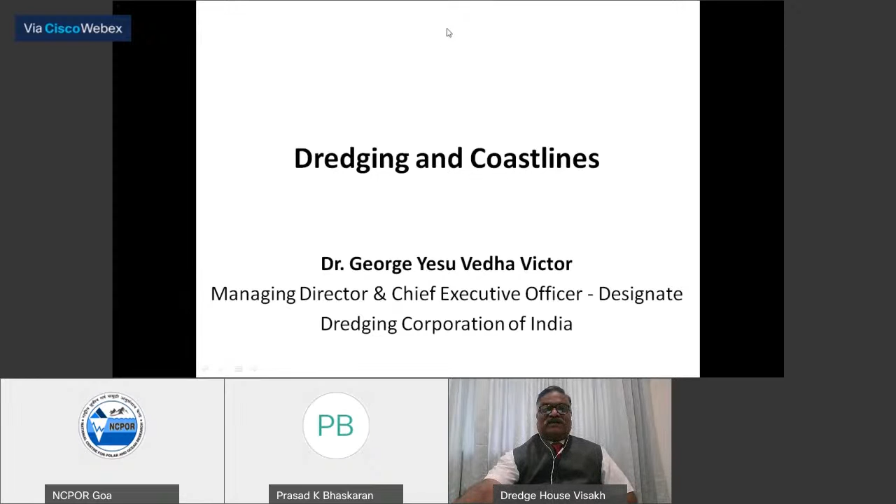To start with, what a coastline is - many of us might have visited a beach, or visited the sandbanks on a river, which forms very unique features. When we talk about coastal regions and people living there, we know the coast has a very unique and distinct feature by which one can find it forms a beach, good for recreation, and the longest beach lines are good for inhabitants to live in.

So beaches are predominantly a good coastal feature, and if someone has observed a beach over the years, one can find that the beach is getting eroded or accreted, which we will discuss in the next few slides. It could be due to waves, because the waves deposit the siltation they carry. It could also be a reverse action - the waves could erode part of the sand on the beach.

The other attribution could be sea level changes, which could have an adverse effect on the coastline. Because we have 12 major ports and about 200 minor ports along the entire seacoast of 7,400 kilometers in India, dredging is imperative and a basic necessity to maintain channels for safe navigation. Dredging also changes the morphology of the coastline, which we will also deal with, on how it changes.

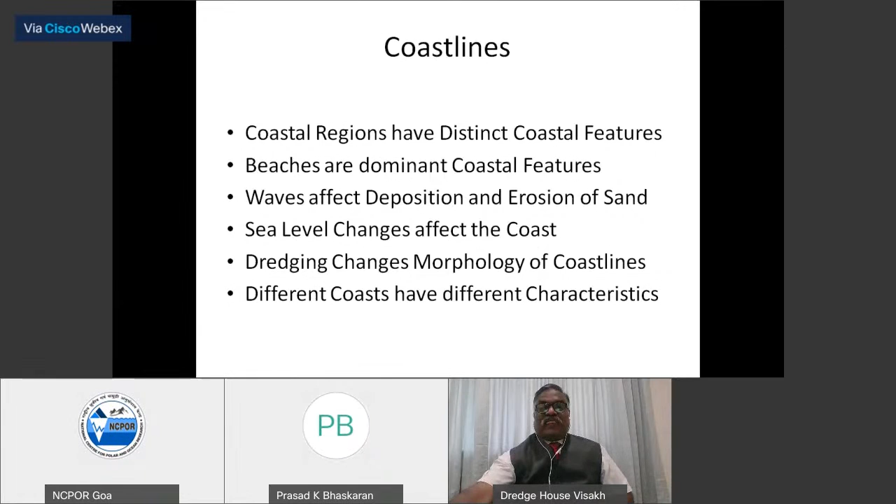A simple example of coastal erosion - it could be natural or man-made. Man-made is due to a structure, and natural could be due to storms, extreme waves, sea level increase, or low pressure that develops in the sea. During a storm, we always have excessive waves, with greater amplitude and height, which carry siltation and material along with it.

When there is a wave breaker, or when it comes close to the coast, it drops its velocity and accumulation takes place. So a storm could either be a phenomenon for accumulating additional siltation, or in places it could also erode the coastline. Similarly with extreme waves - in some places you might have observed the sea is a little choppy with wave breaking zones, or surf zones as we call it.

In the surf zones, normally there will be a shallow area where a lot of accumulation takes place. Similarly, when the sea level increases, a part of your coastline is also being taken away by that increase.

Coastal erosion can also happen because of man-made structures, such as construction of coastal protection. Because we construct so many ports, the coast gets eroded, and to protect our coast we construct groins, revetments, or some other structures so that the coastline is not eroded and is protected.

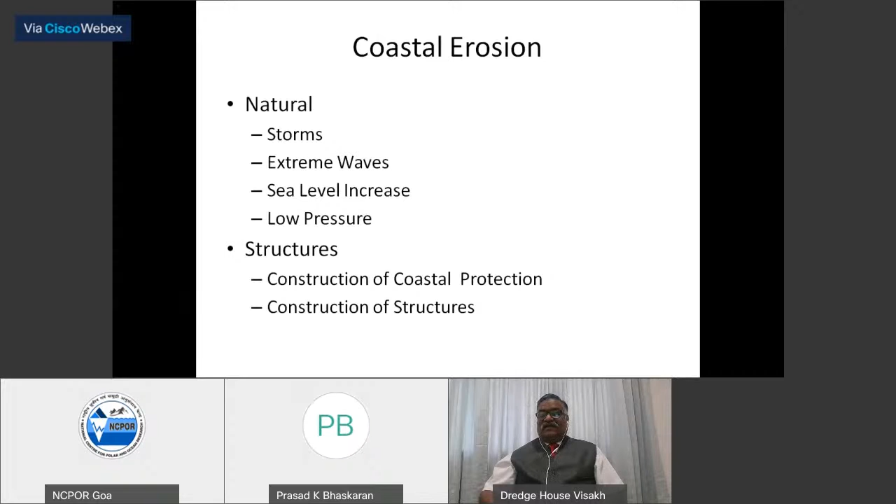Similarly, construction of other structures like a groin, a breakwater, or a trestle, which is mandatory for ports, fishing harbors, or desalination plants, requires some sort of structures. Those structures can have an adverse effect on coastal erosion, and they can either be an action or an opposite reaction.

To give a pictorial representation: winds can have an adverse effect on the coast, waves can have an adverse effect on the coast, cyclones can have an adverse effect on the coast, and so can sea level rise.

When wind, waves, cyclones, or sea level rise occur, it carries sedimentation where the velocity and hydraulics differ in the narrow shipping channel, and it accumulates this carried sedimentation because of the drop in velocity. Once accumulated, it becomes important for coastal or port authorities to clear the sedimentation, and that's where dredging comes into the picture.

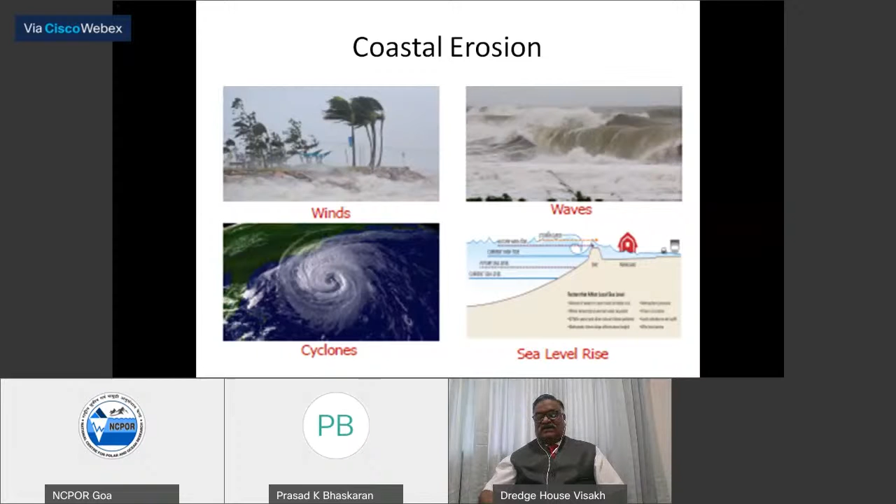Whenever there is a storm or cyclone, authorities measure the accumulated siltation or sedimentation and immediately dredge, or use other cost-effective measures, to clean this material and facilitate safe navigation, which in turn increases the GDP of the country.

So what happens with structures? We saw there are two types: man-made and natural. We've covered nature, and what are the structures? We also know there is longshore drift, onshore drift, and offshore drift.

Take an example: when there's a longshore or littoral drift starting from the south and moving towards the north, if there is no structure or obstruction, this littoral drift will be carried from south to north along with the wave direction. Wherever there is a drop in velocity or a change in hydraulics at a particular place, there might be some deposition and some erosion.

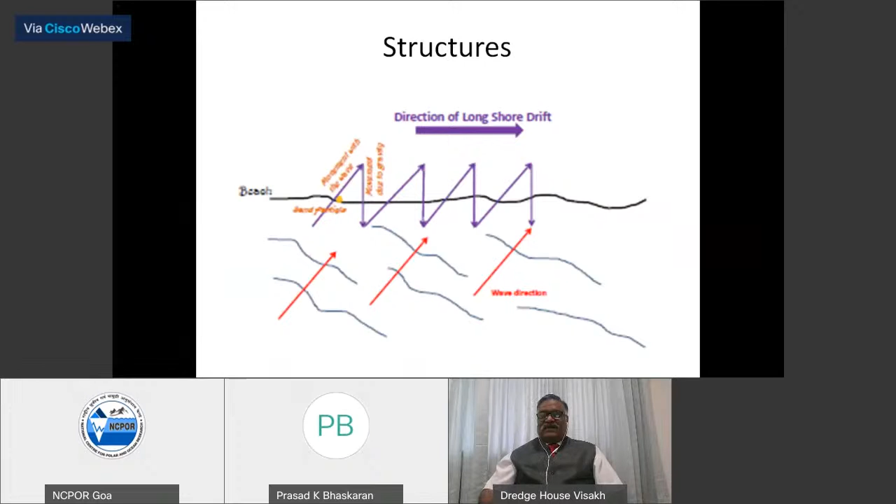Generally speaking, when there is no obstruction from any man-made structure impeding the movement of the littoral drift, the sedimentation is carried uniformly, whether accumulation or erosion happens uniformly. Whenever there is an action, there is an opposite and equivalent reaction. Since there is no action here, there is no opposite reaction.

If you had visited Chennai, Visakhapatnam, or Goa, you could have seen this phenomenon is very predominant. On the southern side you will have a lot of accumulation, and on the northern side you will have a lot of erosion. For example, in Chennai, the Royapuram side as it was in the 1950s or 2000s is totally different in coastline and morphology compared to a few years or decades back.

If you look at Visakhapatnam, it's the same phenomenon. Towards the fishing harbor, or towards Bhimlipatnam, the coastal morphology has changed in the last few years, with accumulation taking place on the south.

Similarly, you can see most of the ports predominantly where they have built some man-made structures by way of breakwater, groin, trestle, or an LNG terminal which is slightly into deeper waters. You will always find there is an action and a reaction: accumulation on the southern side, erosion on the northern side, creating an imbalance. That's where the environmental parameters come into major play.

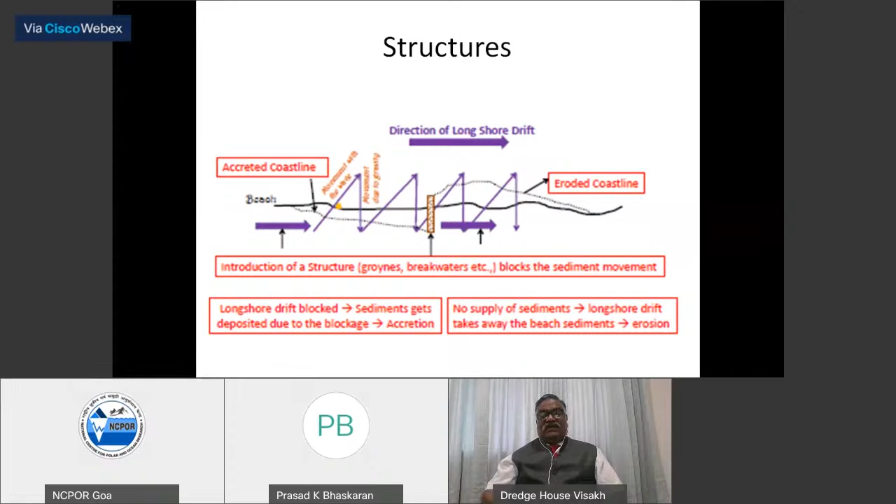And it doesn't stop there. When there is erosion and accumulation, the environmental parameters come into play, and then the environmental scientists come into the picture and devise the best practice methods for how we have to dredge, where to dump or dispose, and how to construct the man-made structure, because we cannot do away with breakwaters or certain structures. So it is a combination of different subject experts in a team which works coherently to see that there is minimum impact on the coastlines and the coastlines do not differ much. That's where the structures come into the picture.

Just to give you a pictorial picture of how the littoral drift or longshore current takes place, I've taken one picture which is in reality, another picture is just an indication of how it looks and how the accumulation takes place. There will be sand particles deposited because the waves break and there is a breakage in the longshore current where the velocity drops. Because the velocity drops, there might be deflection, and the deflection will create accumulation, and it might also spill over into the shipping channel or into the deeper pockets.

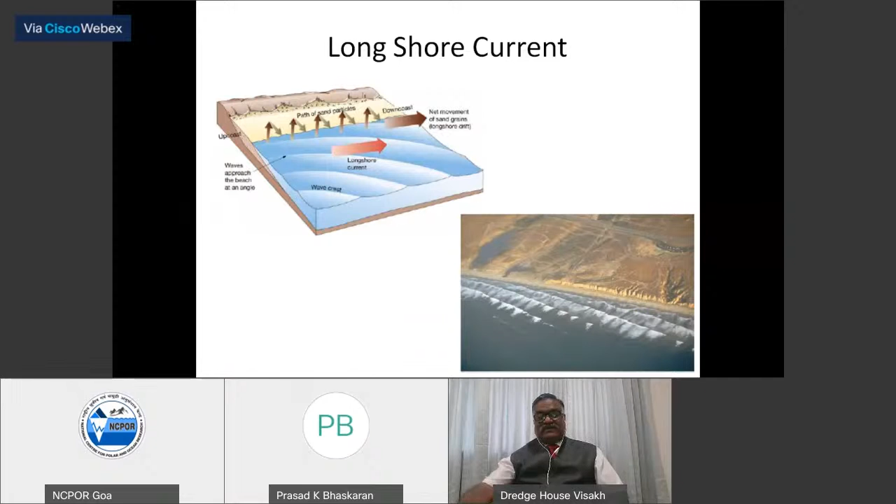On the other side, because there is no velocity, and when the velocity picks up, it always has a tendency to erode and take some of the material from the other side. This is the reaction that takes place when we talk about action and reaction. The action is where dredging is taking place in the coastline, or it could be a man-made structure, or it could be a natural calamity because of rise in sea level, a cyclone, a storm, or heavy waves which carry a lot of material.

You can see at different places how it is eroded, starting from Puri, which is always a target of severe cyclones and storms, Visakhapatnam - last year we had a couple of cyclones, Hudhud and Phailin. Pondicherry is always worst hit, Pondicherry and Karaikal on the southern Tamil Nadu coast. On the west coast, Karwar and the Kerala south coast are always badly affected. Going north on the west coast, a part of Bombay is affected, but not as much as when compared with Puri, Visakhapatnam, or other places on the southern west coast.

If you go further north, the predominance of the effect because of natural calamities decreases, but the phenomena of calamities because of man-made structures increases. If we compare the slopes of the east coast and the west coast, it's drastically different - the west coast slope is steeper, whereas the east coast slope is tapering and gradual. That's one of the reasons you have a lot of sandbars, sedimentation, and siltation getting accumulated in the channels and elsewhere.

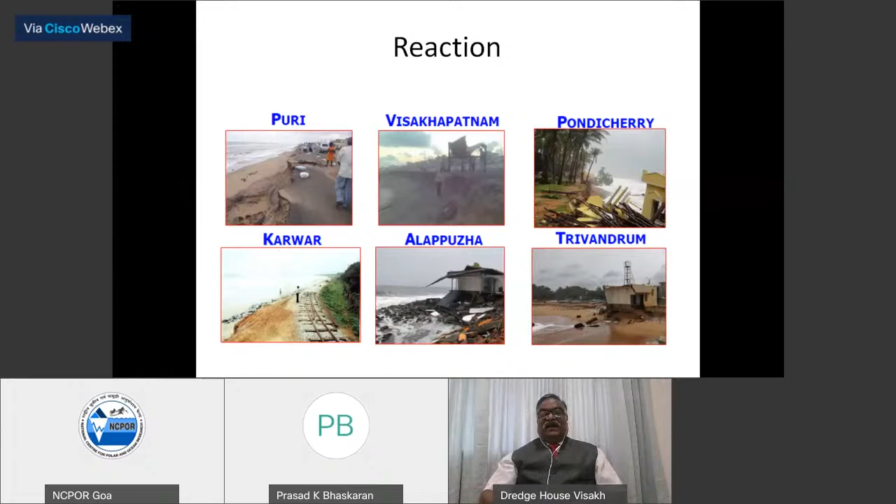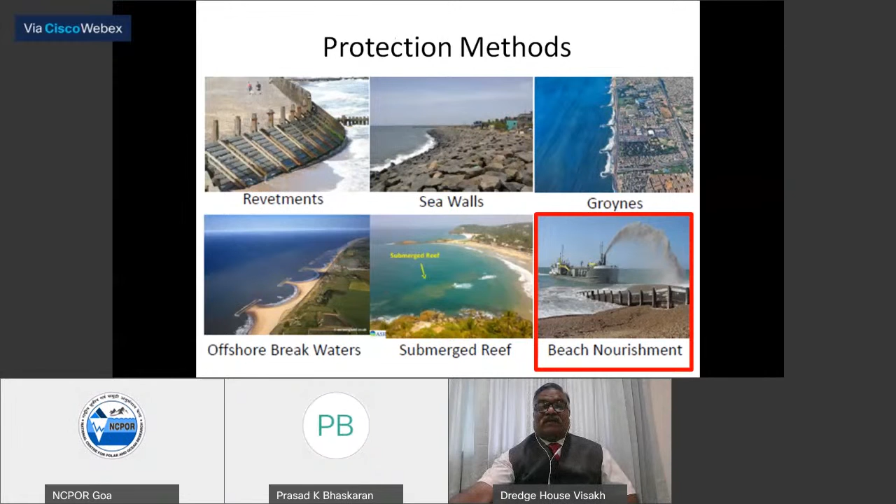So while talking on the coastlines, I said one of the activities the Dredging Corporation of India is involved in is beach nourishment. So let me talk something about dredging. Many of you might know what dredging is, and many of you might have seen dredging activities. But I wanted to give you a bit of an explanation, and collaborate the coastline, the dredging, and the environment. So for that reason, I just wanted to give you a very brief idea of what dredging is.

Dredging started as an art. It was no rocket science those days. It started way back, as old as civilization, when people found that water was getting intruded into their places and wanted an elevated place. That's where they started to dredge. And the first dredging technique was using their hands, to carry the sand and put it on a place where they get an elevation.

As time passed, it became a sort of existence, a survival for existence. And the survival for existence was to avoid water coming into the living area, into the habitat. So they used some sort of technique to have material picked up from the seabed, or picked up near the coast, and then create an elevation in the living area.

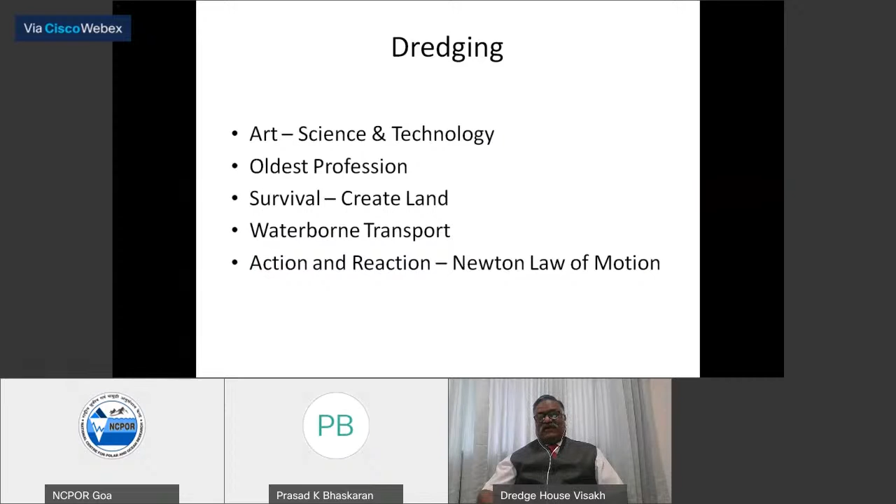When dredging takes place, it's predominant that the morphology is going to absolutely change at some point or the other. It may not be observed close to the dredging area, but probably a little further. In the dredging area, you can always see there is a collapse in the coastline or the material sliding more than what it should slide. So these sort of morphological changes normally take place when dredging activity happens.

Let me give you a small definition of what dredging is. Dredging is nothing but an underwater excavation to create or maintain a new navigation channel, for recreational activities, environmental activities, and commercial activities such as ports, fishing harbors, naval docks, and defense activities, where we need a dedicated port or facility for our naval vessels to quickly get into the sea in case of emergency and requirement. So dredging is basically underwater excavation which removes virgin soil if capital dredging is required, or removes the silted or sedimented material in terms of maintenance dredging.

So in both ways, we remove the material, which could be disposed out at sea at a designated area, predominantly designed by academicians or researchers. Normally it's done by NIO or NIOT. They give us the coordinates where that dumping has to be done out at sea, so that this material does not come back to the coast or back to the dredged navigation channel.

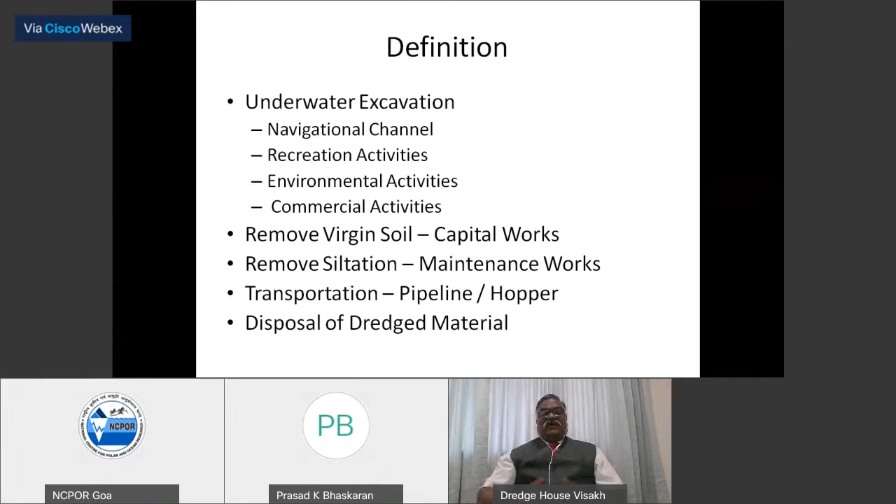A dredger is an equipment used to dredge. In earlier times, it was a primitive age where it all started with hands, then the spoon, then the shovel, and then they adopted other mechanisms which were too primitive. But with the invention of steam engines, engines, and pumps, they slowly graduated based upon inventions added with innovations. Today we are in a better position where we work with the latest technologies.

A dredger is nothing but a tool which facilitates the activities of excavation, storage, transportation, and disposal. The equipment could be mechanical or hydraulic - it can be a mechanical dredger or a hydraulic dredger.

Evolution of equipment, which we already discussed, is basically of two types: mechanical or hydraulic. Mechanical was primitive equipment, and today we have all hydraulic equipment. Nevertheless, we have not done away with mechanical equipment like a backhoe, a grab, an orange peel grab, or a bucket ladder dredger. It's not obsolete even in today's terms. It is more useful to dredge at corners or lesser maneuverability areas where hydraulic dredgers would not approach easily, or where their efficiency would not be economical. So in those areas, we always use a mechanical dredger.

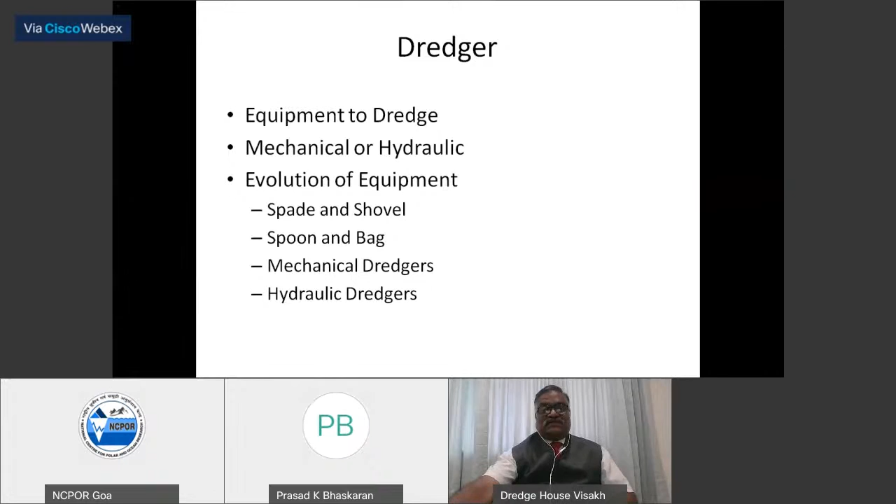What do we do? We develop ports, we develop harbors, dam rivers, and dredge tidal inlets. In India we have only two tidal inlets. One is on the east coast, one on the west coast. On the east coast, the only places are Haldia and Calcutta. On the west coast, we have two, rather three: one is Cochin, Goa doesn't have a tidal inlet for the port, we have Hazira, and the third is Kandla.

So these are the tidal inlets where you have to always keep a close watch on how your channel is going to behave, because your channel alignment might change depending upon your tidal prism. For that reason, dredging in tidal inlets is a bit cumbersome and challenging compared to dredging in a conventional, artificial, semi-artificial, or natural port.

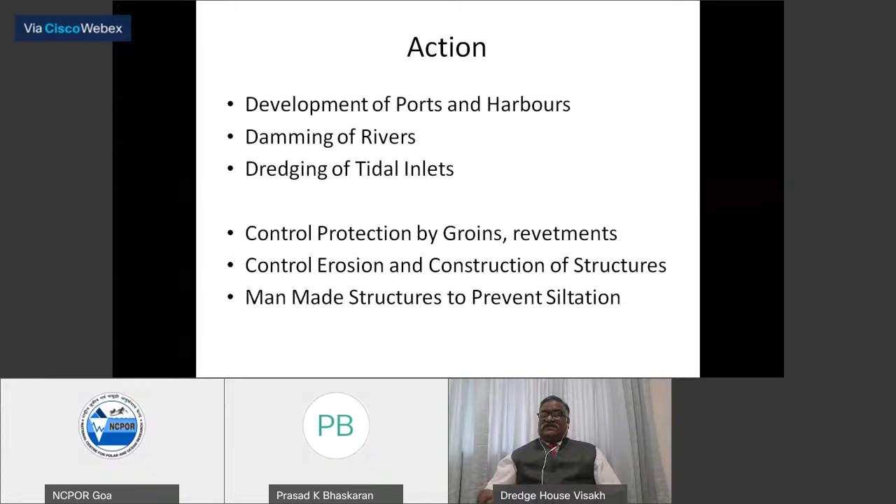The actions are: because we dredge, there is a change in the morphology, there could be a change in the coastline, and there could be changes elsewhere, not within the port limits. For that reason, the reaction is you have to control these changes and maintain balance. So you do some man-made constructions, structures of coastal protection to maintain your coast or your river banks in case of inland waterways, by building groins or revetments, or to control erosion. You also build structures especially for breaking waves and to prevent siltation in case of a tidal inlet.

Dredging activities, as I earlier said, we do not do only one type of dredging. We have a gamut of dredging, which starts with creation of a navigation channel, which we call a greenfield port, and maintenance of the navigation channel is a brownfield port. Then we have beach nourishment to make balance on both sides, and reclamation works, the creation of new land. This concept is not very new, it's very old, and we have created more lands.

Right now in Bombay, we are creating additional land of about 3 square kilometers, 1.5 to 2 square kilometers, and they are extending by another 800 meters diameter. So reclamation works can be for reclaiming low-lying land, creating new land for construction purposes, or creating new land for some other purposes.

Sand mining, again, is not new in India, but now it's one of the key topics of interest for the Ministry of Shipping, where they say you have to dredge, and even sand mining could be one of the options where there is a scarcity of resources, majorly sand.

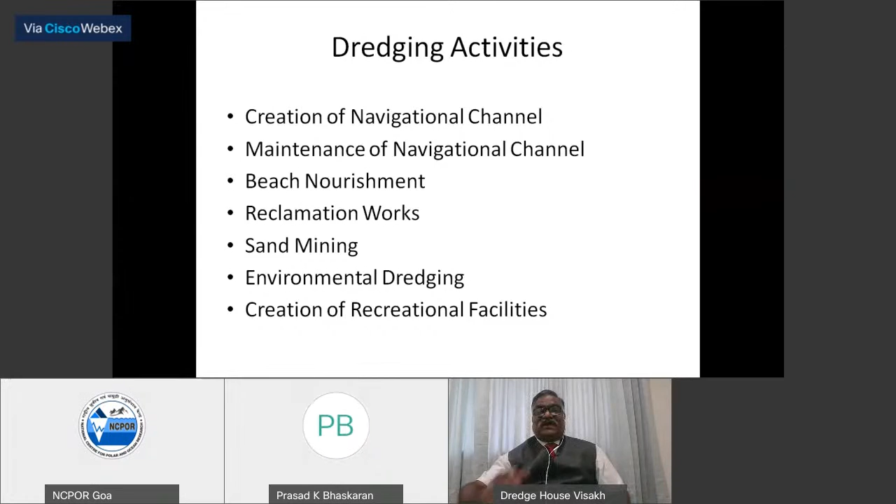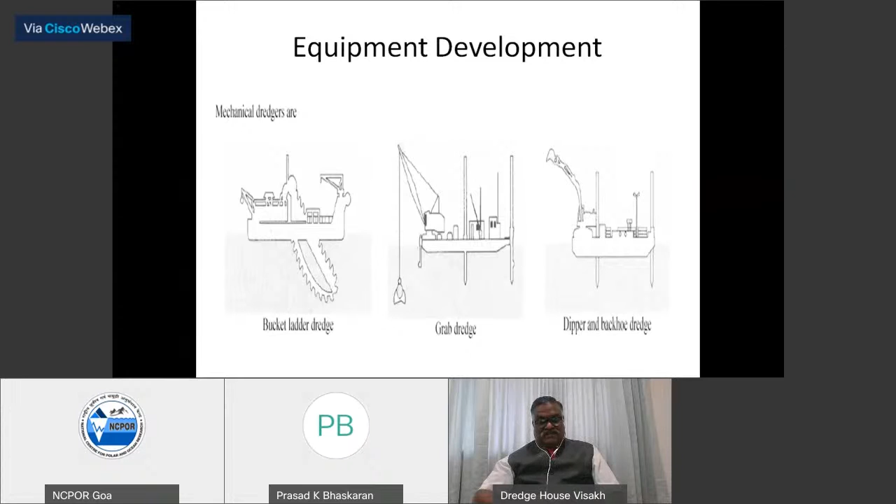I will quickly run through the different types of equipment, starting from the primitive age. I will leave aside the primitive age, and discuss the mechanical dredgers: the bucket dredger, the grab dredger, the dipper, and the backhoe dredgers.

This is a typical bucket chain dredger, which is obsolete because nobody is using it anymore, due to the cost-benefit variance. It's very slow, and the cost per cubic meter is a little higher than the latest dredgers.

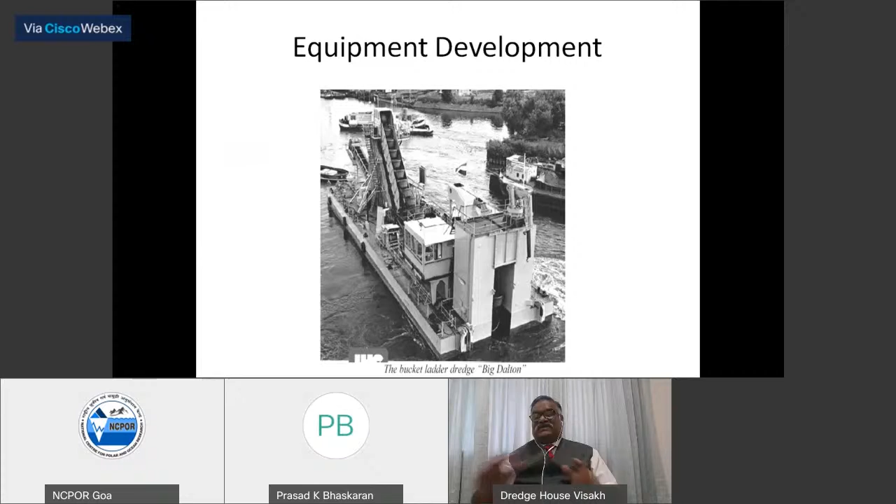For that reason nobody uses it, but it's one of the best tools. There are only two such equipments in the world. One is owned by Rohde Nielsen, and the other one is owned by a private party in the Middle East.

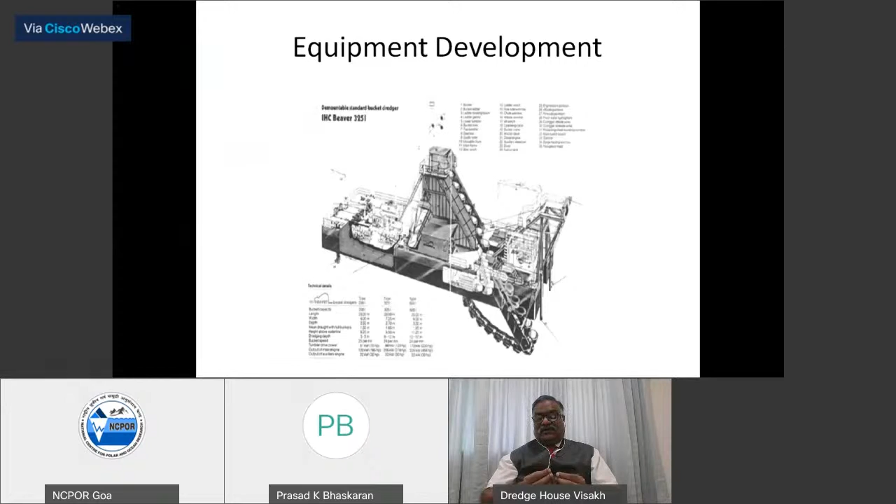This is how it looks like, the bucket ladder dredger, which has a chain of buckets of about 3 cubic meters, and the minimum is about 0.8 cubic meters. This chain runs throughout, and these buckets are made up of heavy material.

So that it can dig up clay, or it can dig up weathered rocks. This is a clamshell or grab dredger, a backhoe, and again a backhoe, a front shovel and a back shovel. We've got two different sorts of backhoes.

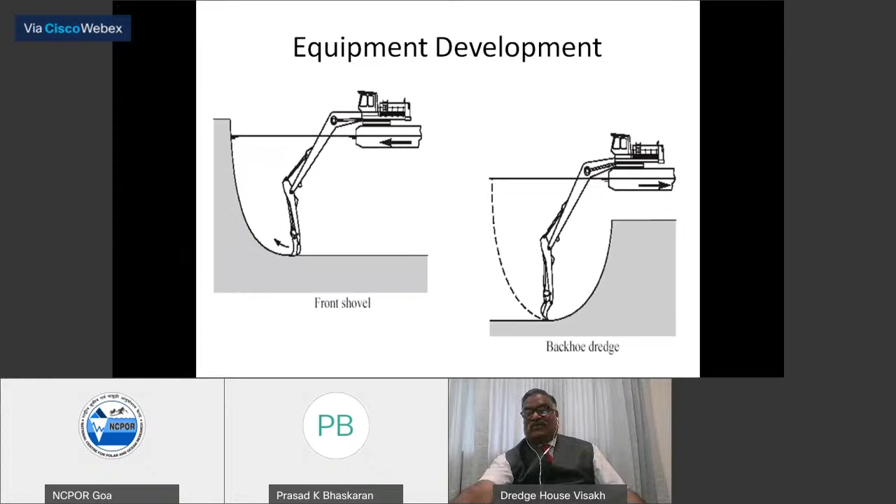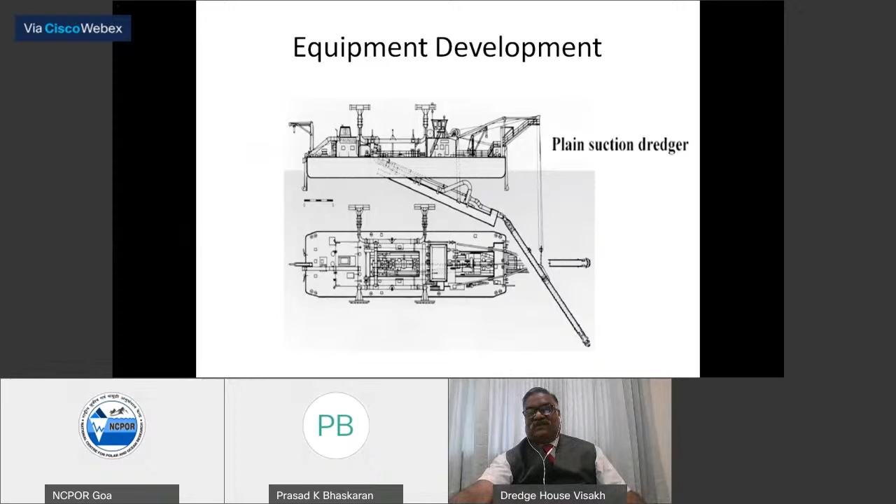This is a plain suction dredger. This is again a cutter suction dredger, but it's a very plain suction dredger, well suited for silt or very soft material. These hydraulic dredgers are basically the cutter suction dredger, the trailing suction dredger, and the plain suction dredger, which form the same family.

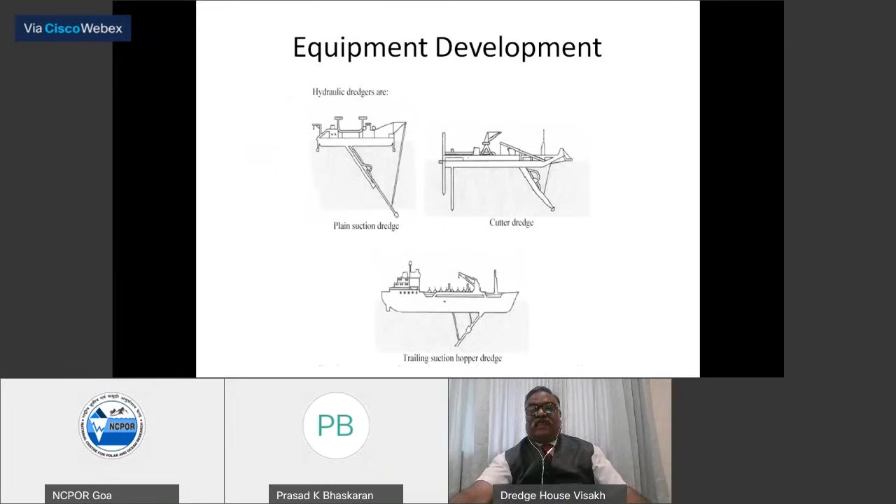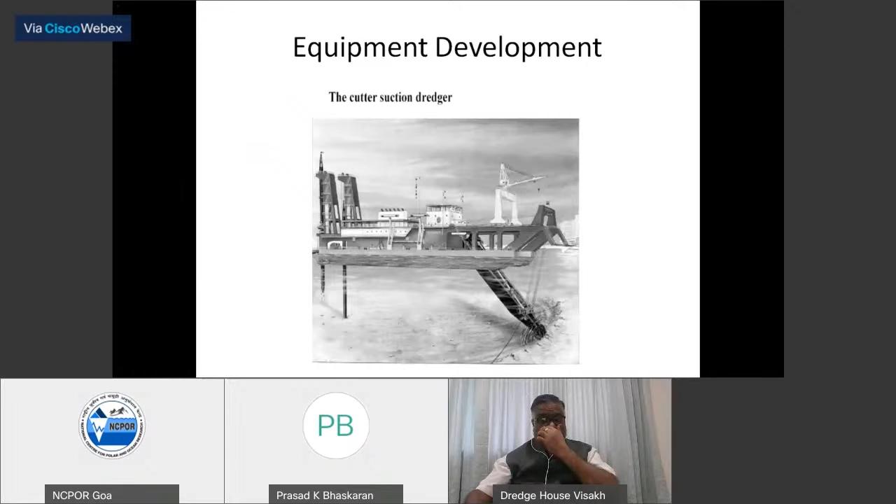The cutter suction dredger with a cutter can dredge sand, can dredge clay, or can also dredge up to a certain N value of rock, which could be about 50 to 60, depending upon the cutter power installed. And the barge unloading dredger, which is not an uncommon phenomenon.

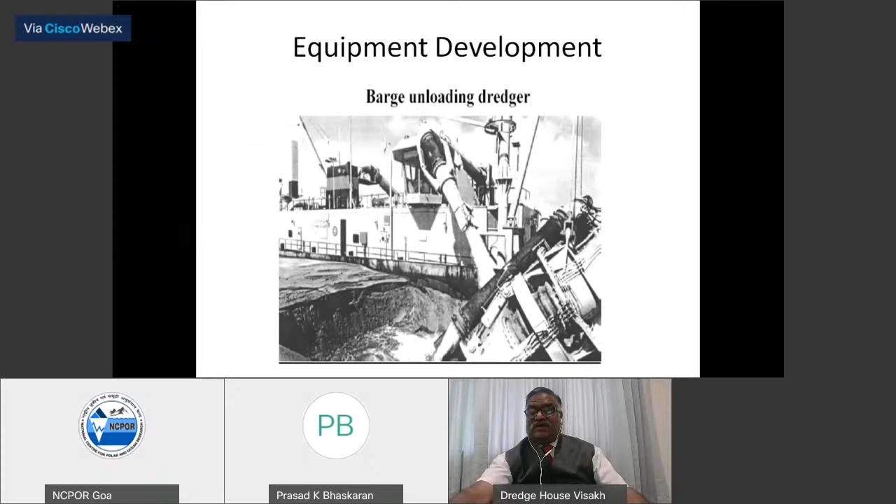We use a barge unloading dredger for a cutter. This is what the cutter is. The difference between the clay cutter and the rock cutter.

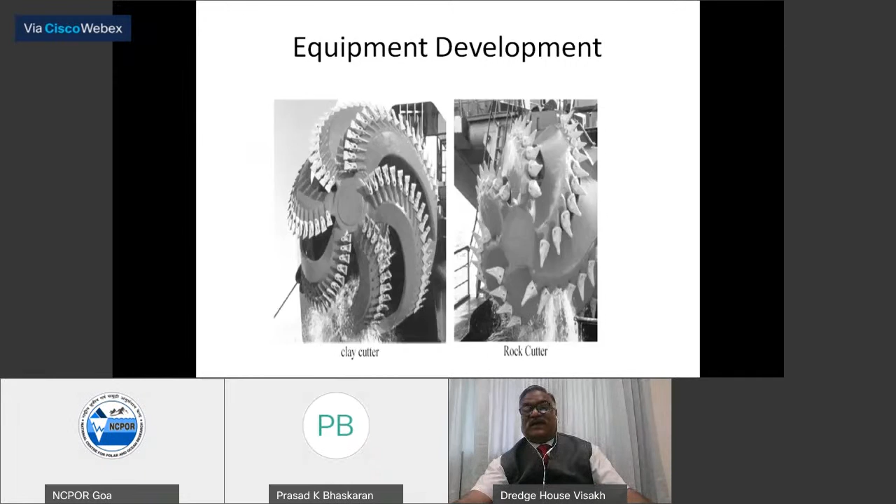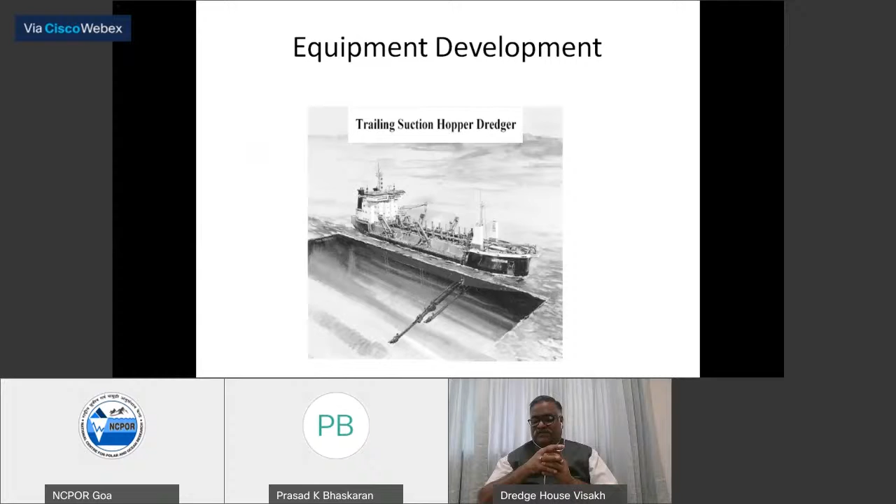This is what I was talking about. This picture I took from a book, Herbich, but today the smallest is 450, and the biggest is 45,000. So that's the variation of hoppers we are talking about.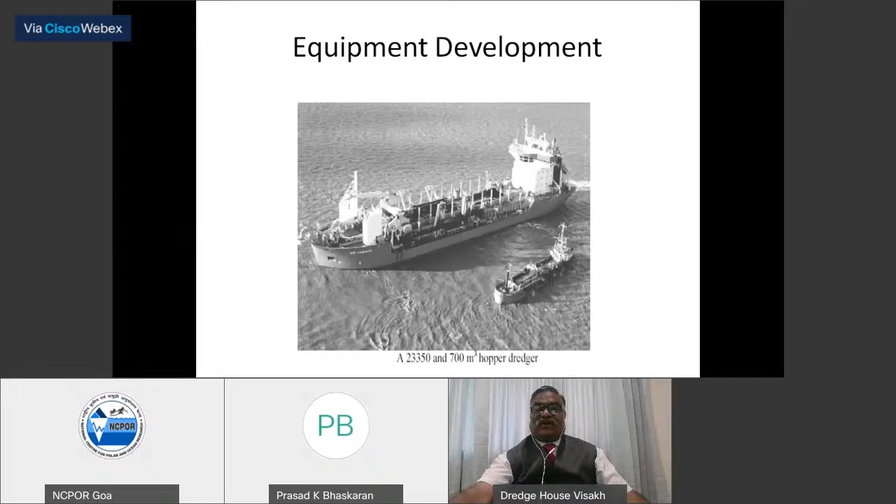These are different types of beach nourishment. You nourish the beach using a pipeline, or you can nourish a beach using a rainbowing system. If the gradient is much deeper, as in the west coast, you can always use a rainbowing system.

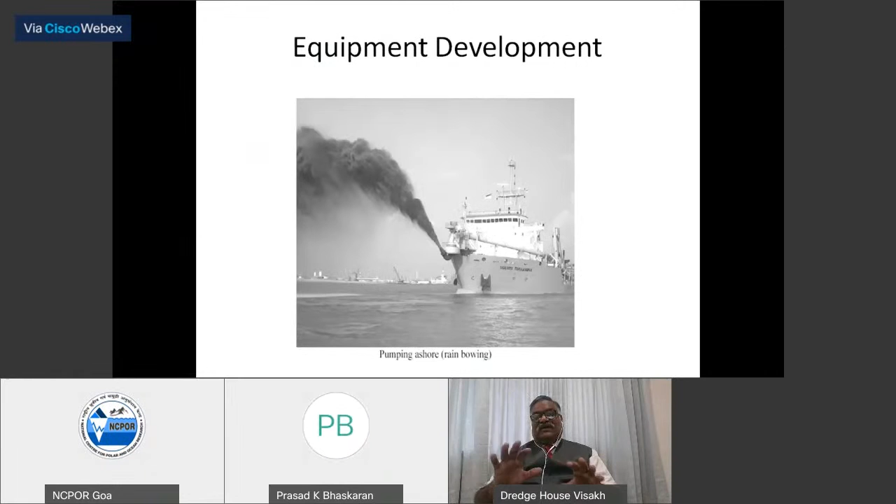But if you are doing beach nourishment on the east coast, because of the gradient, you cannot go close to the coast. So you have to anchor your vessel a little farther where there's water depth, and then pump it through a pipeline.

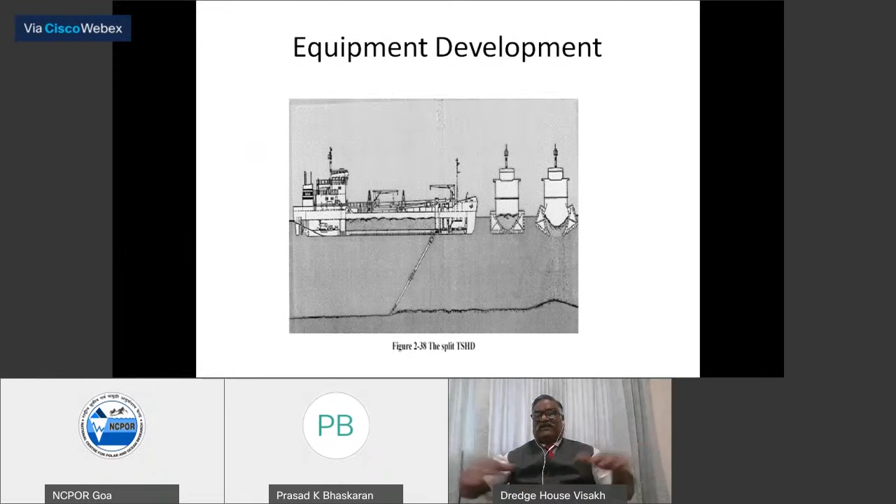This is again a split hopper dredger. Split hopper dredgers are not many in the world now. It's getting obsolete because of the disadvantages of having the hopper split into two. But there are still a few dredgers available.

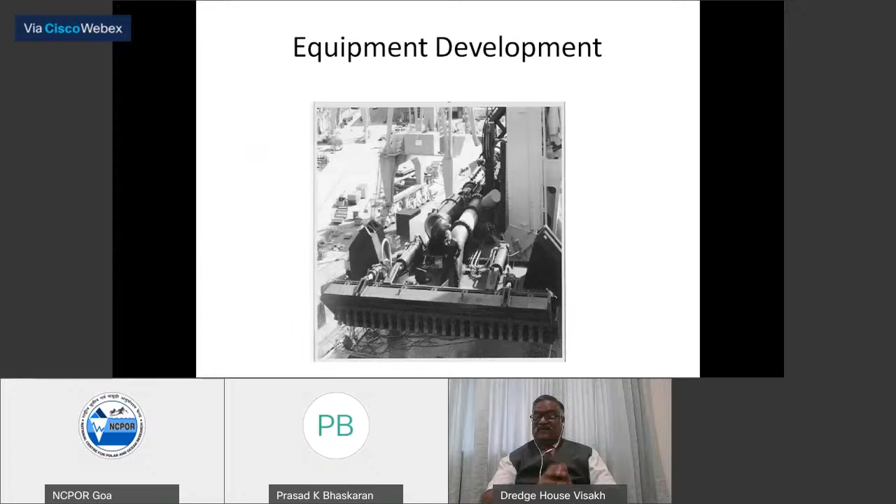This is a draghead, a typical draghead, what we can think of. This is how a conventional draghead takes it. This draghead can dredge stiff material even without any problem.

Once you know that, you can design your channel, considering certain things, like the degree of salinity, because the draft in seawater will not be the same as the draft when it comes to the shore, or to the port where it's brackish water, or fresh water.

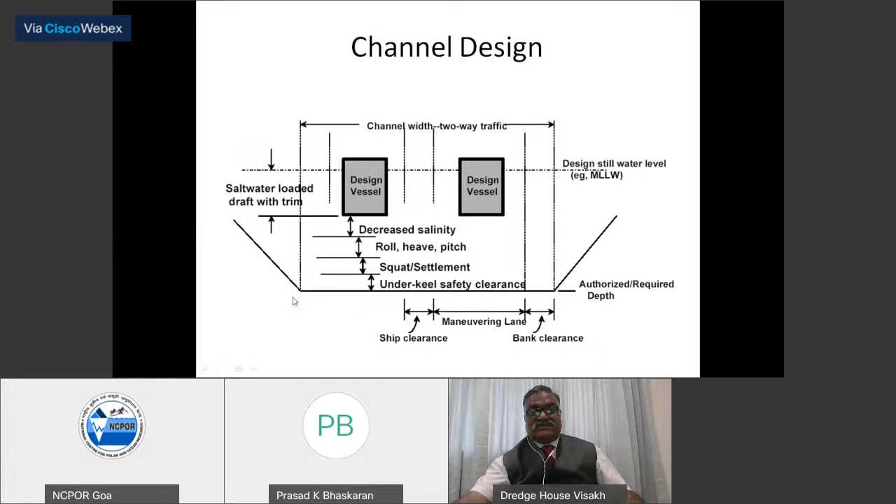I showed this is the channel. This is channel design where you have stable slopes, and this is the bottom of your channel. But when it comes to the commercial design, you cannot have exactly how you design it.

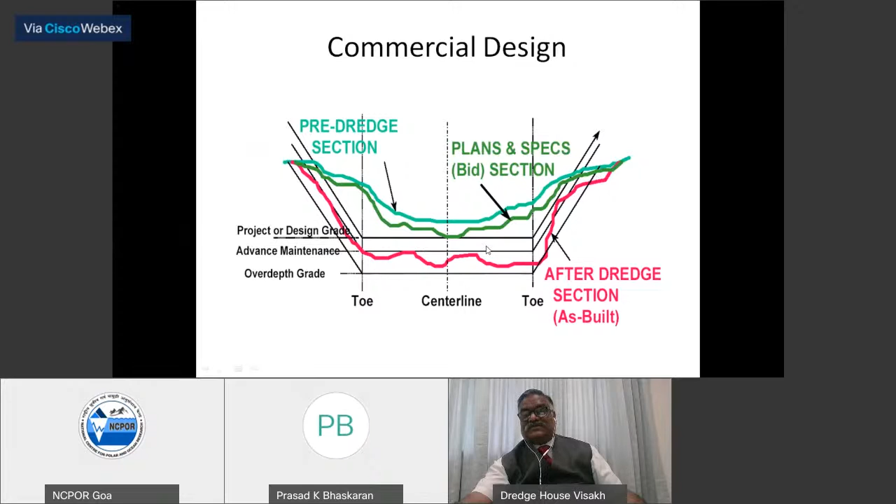That means this is a design channel wherein your finished level is this, so that channel is clear of any pinnacles or high spots, and this is safe for navigation. You cannot have this, because this is how siltation has taken place, shown in light blue, and the green color is the plan and specifications at the time of bidding. So this is a typical commercial design, I just wanted to show you.

Having spoken about dredging and coastline, the third aspect, which is more important, is the environmental aspect. Without environment, dredging or the coastline balance cannot be met. For that reason, we have to closely work with environmental researchers to understand what the environmental law talks about, or what the environment clearance talks about, and how we apply these activities so that the balance of the ecosystem is conserved.

And if it's drilling and blasting in case of rock, then you need drilling and blasting permission. Then the most important thing is the protection of mangroves. If there is a mangrove, then there will not be an environmental clearance at all. So mangroves have to be protected.

Then protection of freshwater bodies, in case dredging activities are going to destroy or have an impact on freshwater bodies, separate clearances shall be met.

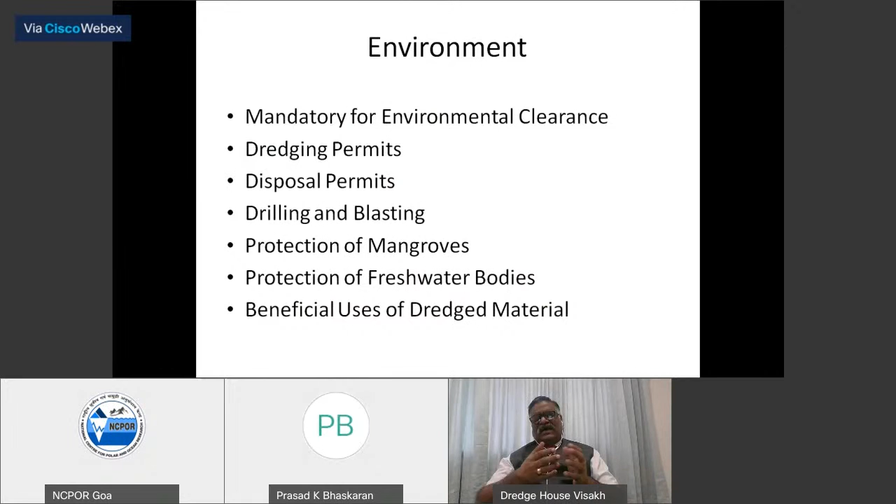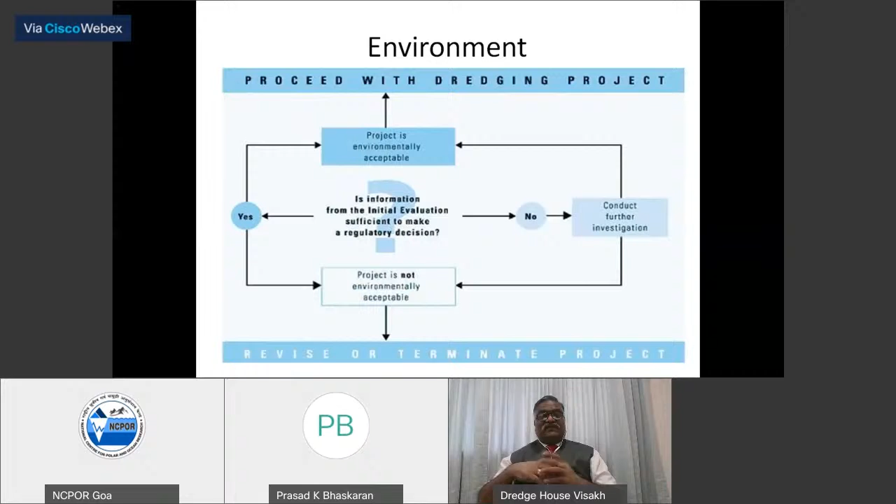And this is the environmental pattern, how for a typical dredging project, the project has to be environmentally acceptable. Then you go in for the initial evaluation, and if the evaluation is acceptable by the regulatory body, then you can go ahead with the project. If it is not acceptable, then you have to conduct further investigations as mandated or directed by the regulatory bodies, and therefore the project can be accepted.

And when talking about the Indian environmental clearance, we've got 5 arms: the Ministry of Environment and Forest, Ministry of Agriculture, Ministry of Animal Husbandry and Dairy, Ministry of Shipping, and Ministry of Defense. We need to get clearances from all these 5 ministries in order to have an environment clearance in hand.

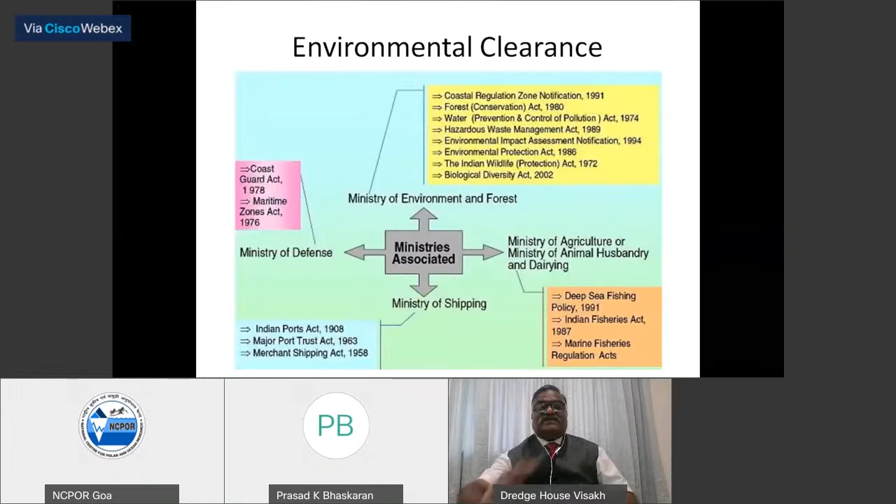I think everyone of us is aware, but just to show you how important it is to get environmental clearances, and also how important it is to coordinate with different departments to get environment clearances. Before I finish, if you look at the local, state, and central levels, all 3 have to deal with environment clearances.

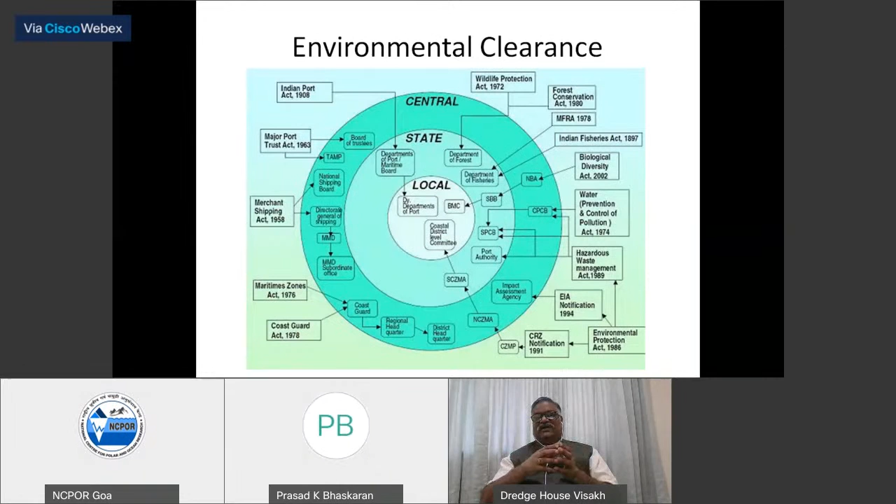If you look at a typical project, it starts at the panchayat level, then the state environmental team, and then the central environmental team, which finally clears and gives the environmental permit. That's what is shown in this diagram, where it starts with the panchayat, then the state, then goes to the center, and all the acts have been stipulated or tabulated there.

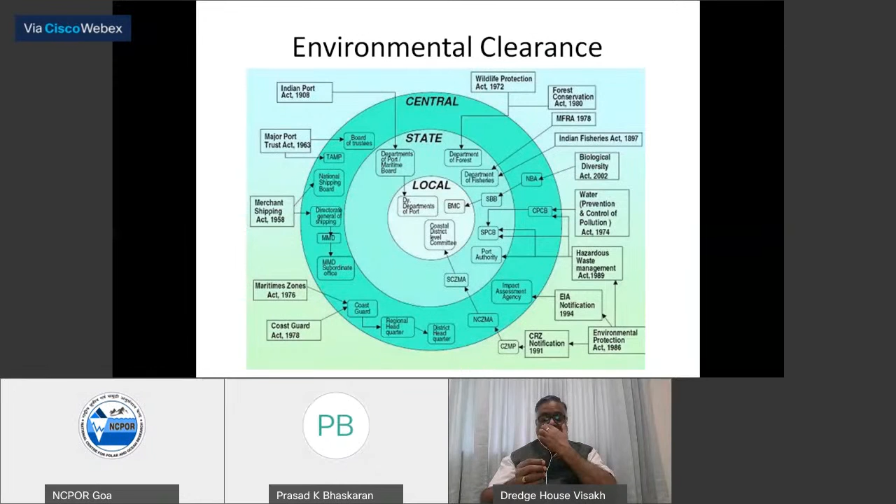I think as an environmental researcher, and as an oceanographer, or as an oceanographic engineer, or as a civil engineer who works very closely with the environment, this will be one table which gives you all the acts to be incorporated if you're going for environmental clearances.

Before I complete, I just wanted to give you a small brief. We saw Coastline, we integrated it with dredging. Then we saw what is an action and what is a reaction, and how we have to balance the environment, and what inputs are required for environmental clearances, who clears them, and what acts are required.

Having said that, I just wanted to give you a small brief of what Sagarmala is. Many of us know what Sagarmala is, but to give additional information, Sagarmala is an integration of inland waterways, coastal shipping, and ports, for last mile connectivity, so that we have seamless transportation and delivery of cargo, even from the hinterland to the ports.

Sagarmala envisages that hinterland cargo is transported through inland waterways, and then gets into coastal shipping, where we will have intermodal jetties, intermodal ports. Then we will have ICDs, where cargo will be stored, and hub ports where all this cargo will be connected. If cargo is being imported, it comes to the hub port, then to coastal shipping, then to the ICDs, which will be taken by inland waterways to the last mile connectivity.

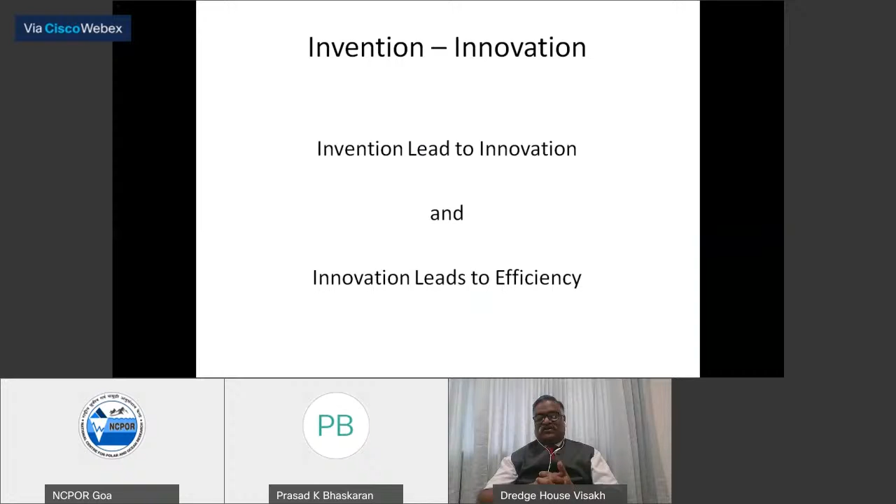And I do want to close it with invention and innovation, which I was talking about. Invention leads to innovation, and innovation leads to efficiency. Thank you very much, and if there are any questions, I'll be pleased to take them.